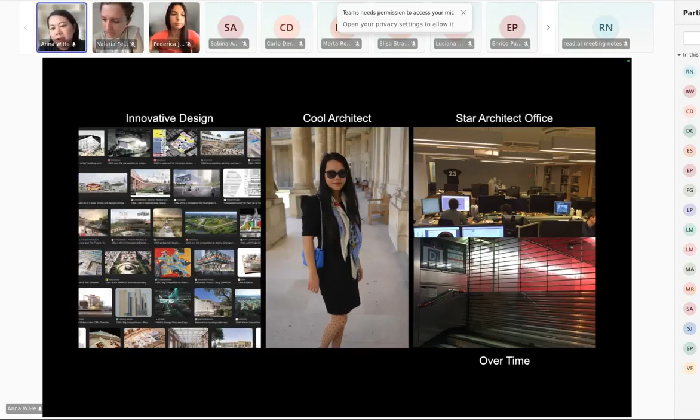First of all, we heavily rely on manual input, our time and our efforts, everything, so a lot of overtime almost every day. And for those innovative designs, all those nice ideas eventually went to the archive folders or trash bins. It's kind of a waste of our intelligence. I also found myself eventually became a competition architect, which means I only knew how to do nice design for competitions, but I was not really an architect. I kind of got lost in the loops between the procedures, from the briefing to concept design, schematic, and all the workflow. I wondered where this came from, and I found that the nature of our workflow gave us at least five gaps.

The first gap is between the brief and our understanding, meaning what clients want and what the possibilities are. Something we have in mind is not aligned with the client because we are two different human beings and we don't understand each other. So there are a lot of barriers by language, by any kind of communication or methodologies. So this is the first.

And then second is when we start to do the concept design, once we understand the client's demands, we find ourselves with a gap between our brain and our hand. So something we thought cannot really be represented out to our team, to ourselves, to the client. So once we try to represent ourselves in an architectural format, we cannot really get the right point.

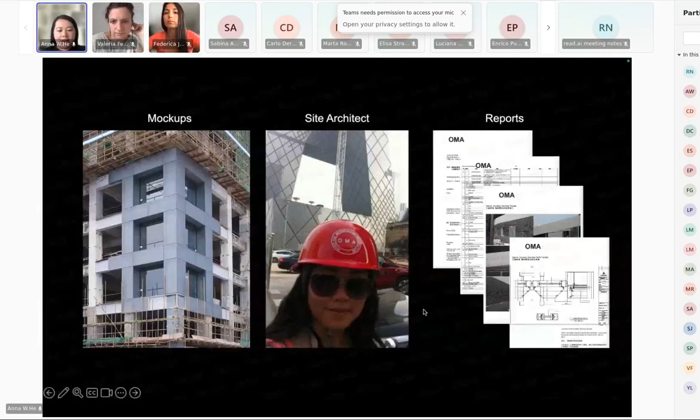All right. I went to the site and became a site architect. But I also found on site there are a lot of things unexpected, because the site architect by nature translates information between the professional language and the ordinary language, from the consultant, designer, contractor towards the client and the procurement team. So we kind of got lost in translation. And with these two parts, lost in loops and lost in translation, I was wondering what we can do to make it better.

So I was thinking maybe we are lost in the loops because we lack automation. We only rely on manual work, which gives a lot of work and a lot of loops we have to loop around. And even if we understand each other better, we need automation to assist us to move easier or more efficiently in the loops. So this is the first thing I thought maybe is a solution.

And lost in translation, I thought that was maybe a lack of intelligence, because of all the things we don't understand about each other from the site, I mean, from the site condition towards the data towards the client's understanding. So how about we propose something to resolve these two issues? For lost in loops, lack of automation, we can use algorithms to design things. And for the second part, maybe BIM, the building information model, can solve this issue.

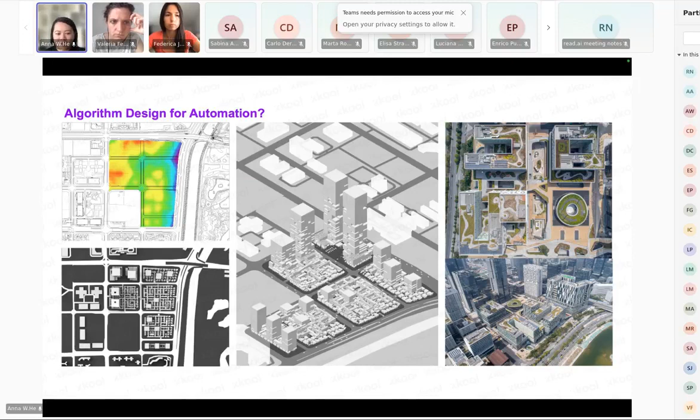And second is, how about BIM to resolve the loss in translation? Of course, we understand BIM is already very advanced compared to CAD. But according to the buildingSMART definition, we are still under level 2, level 3, meaning the machine-readable document and the machine-readable content. But in the future, we are looking for a new format, which is machine-interpretable content. What does that mean? It means the machine can do self-learning, self-analyzing, and validation, even iteration by itself.

The machine does not just communicate with the people, like level 3, or communicate the content itself, but the machine can communicate between different machine models. So this is the future format in our AEC industry. It's more like including all the data, model, and the pattern. All the things can be included together. And with this information, we can compare level 2, level 3, and level 4.

Level 2 only has the model itself in 2D or 3D, the geometries, and it can be opened by software and edited, of course. And level 3 is you have semantics to enrich the content, however, still manually. So it has the data, but level 4 is with data, model, and the pattern. The pattern means the intelligence within it. And this is the goal that we are looking for.

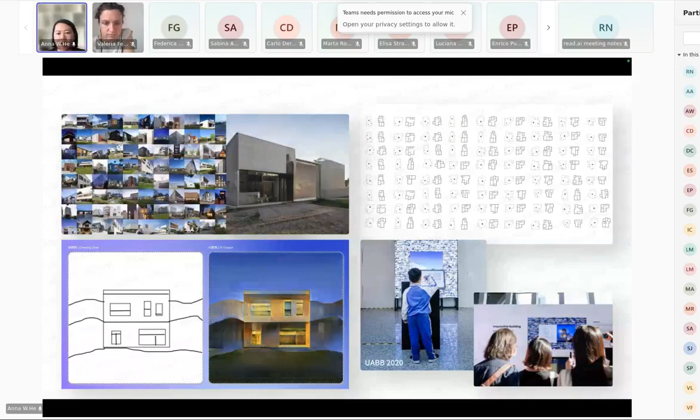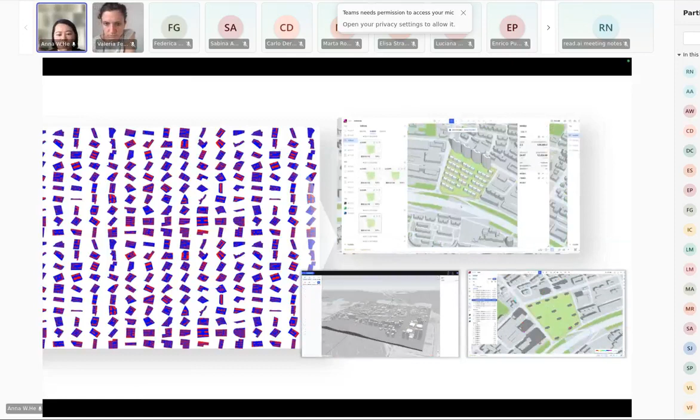We're using GANs to generate images. Today, of course, everyone knows our LookX or Midjourney, but we already started on this quite a long time ago. And meanwhile, we have been working on 3D geometry generation since 2016. Those start from the bigger scale of master planning and then go towards the building scale of the inner space. For instance, this one, you're just using those color bubbles to generate the layout, as well as to generate the 3D geometry in certain building typologies.

So our vision is to really add AI into the workflow. This AI can be our AI or can be other AI models. For instance, the first gap between the client's mind and the loops, it can be large language models. And today we already have a lot of mature large language models, open source or not, doesn't matter, but there's a certain capability that can fill in the gap.

And what we are focused on is discovering the possibility if we chop this workflow into 3 parts. So understanding the requirements can be dealt with by large language models, the chatbots, and then discovering the possibilities. This is the part in AEC, at least, we need to work out, not just images, but also the conceptual and the schematic. Those are 2 parts of it. And finally, the output feasibility or feasible set. And that needs more details with the level 4 format. So I will start at the first part and then go to the second and then the third.

The first part, I think everyone understands right now. You can just throw your briefing into ChatGPT. It will give you a lot of explanation or analysis out of it. But what we need to do, the second part, is how we can merge with the current architectural workflow.

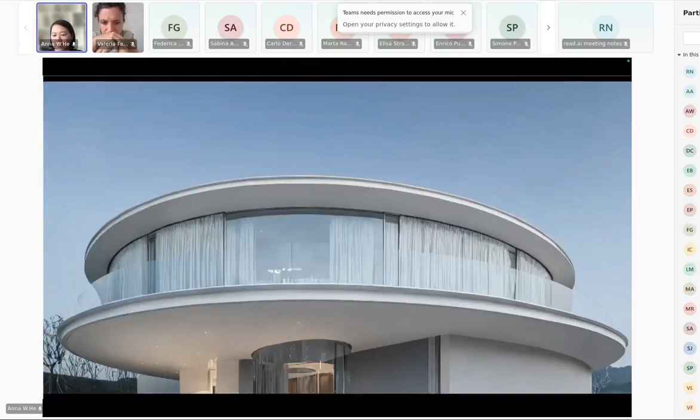And then they can directly try to find possibilities or ideations from his sketch immediately in front of all the audience in this forum. So this is also mimicking a scenario. If he's facing his client, he can sketch and generate something for the client's understanding, and then they can easily communicate to fill in the gap, and also fill in the hand and brain gap. So this is one of the examples.

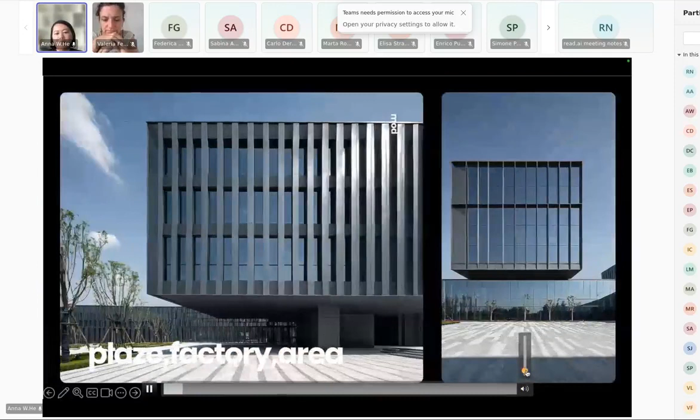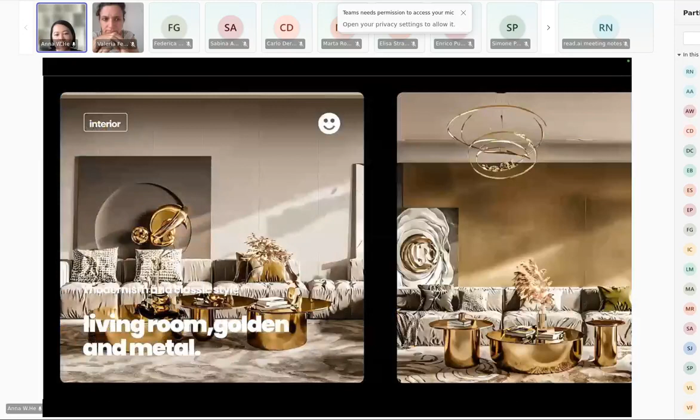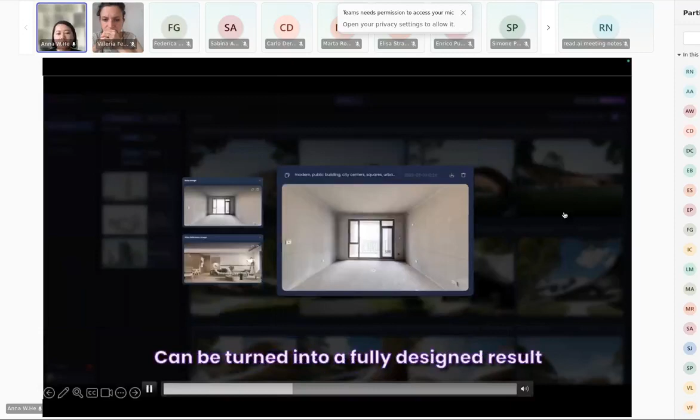So I believe maybe some of you already use LookX, the platform that we have. LookX is now a platform a lot of designers and architects are using, from text to image, image to image, and image to video, and so on. And we are more focused on the design parts, especially architecture, urban design, landscape, and all our base models are trained on that data. And meanwhile, different styles and the demands of the industry are embedded into the system. So it's quite precise to translate an architect's ideation into something the client and team can understand.

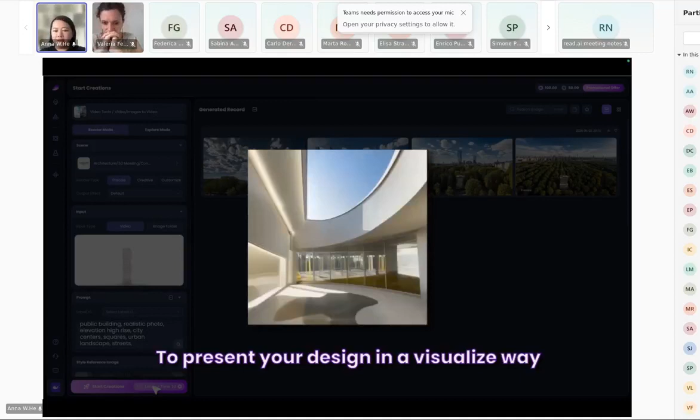And meanwhile, there are a lot of tools. For instance, this one, you can choose an area to regenerate, and here you can screenshot any kind of software, no matter if it's Rhino or Revit, to generate things. And also video generation, we can use text to video or image to video. Image to video is now much better because the image has a certain quality and can ensure you get the right thing. And with this kind of video generation, at least you can give the client a 3D feeling and experience, and they can understand what the thing is doing.

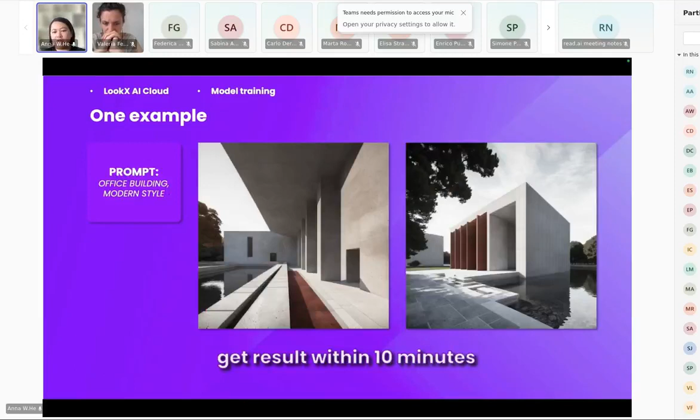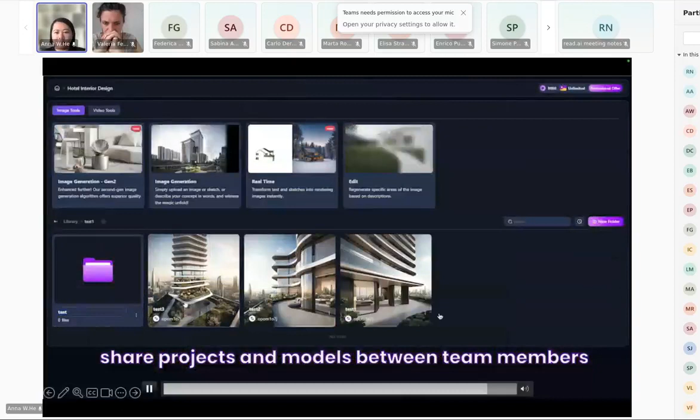And besides that, we provide this AI for the users, like architects, to use and to train their own models. So you can use your own favorite images and train the model as a LoRA model. A LoRA model is a low-rank adaptation model, and you can use it for your team. And your team can train models together, and then just use them for your company or for your team, whatever it is. And this is something we can help the team to manage all the team figures.

Yeah. Meanwhile, we also got what we call the dashboards for the team to check. So this is basically the first and second parts of the gaps that AI can help with today. So this is one of our latest models, Gen 2; you can get from image, and meanwhile generate the videos. Again, our models are trained for architectural purposes, designer purposes. So it's more precise in that direction compared to Midjourney.

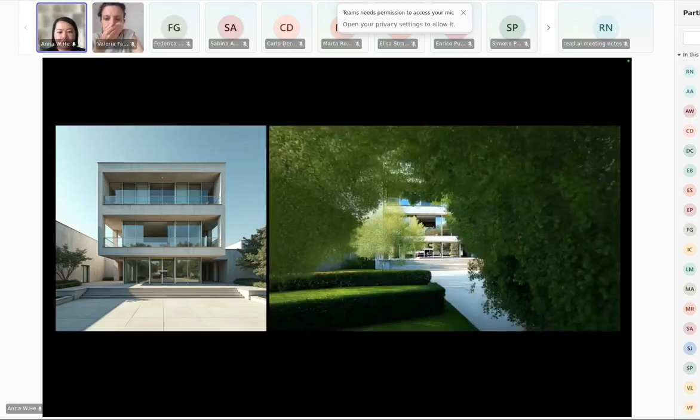And we can see today, this is our creation plaza. A lot of designers share their outcomes on this plaza. So you can see what others did, and you can learn from each other. I think this is something really interesting, that we create this kind of ecosystem so everyone can see each other and learn from each other. You can just click on one of their works and find out what their prompts are, how they deal with images, and so on.

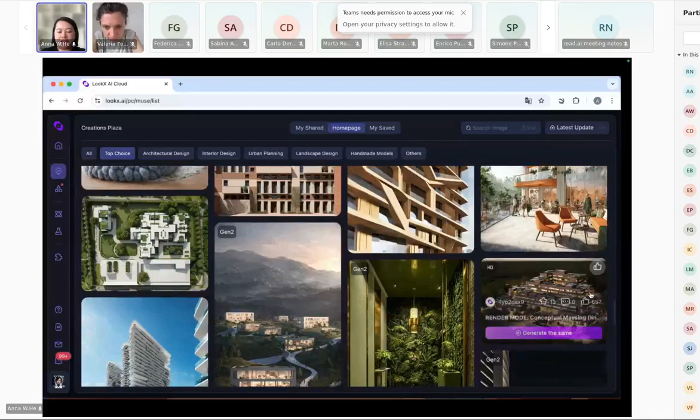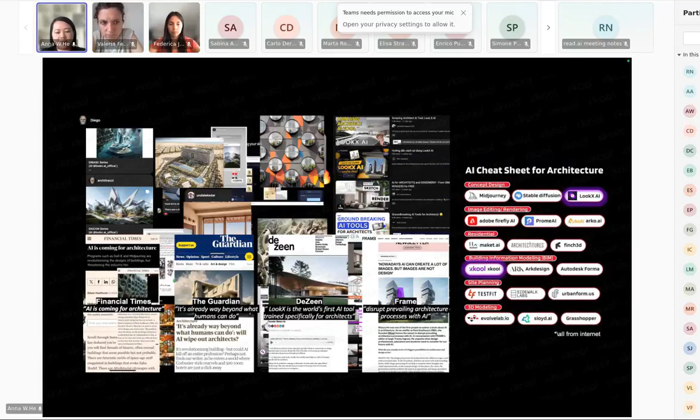Actually, I had a discussion with Rem. Rem was here a couple of months ago, visiting Shenzhen with me in China, and we introduced what our AI can do to him. And we quite agree that the early part of the design workflow definitely needs to be driven by people, which is from the issue finding, positioning. Today our forum is positioning AI, right? So this is something very important.

Before we start to do something, we need to think through and then find our argument, and then the solutions for different scenarios. And from there on, AI can start to help on the schemes, on the representation, and perhaps also on the realization. So this is what we think of as the ideal model for the later part, how AI can be involved. I will give an example of one project from A to Z where we have involved AI.

First of all, this is a competition in the beginning. The site is located in the center of China, in between downtown and one of the largest cities in China. And the issue we find is that it's in between a biological habitat and a human habitat, and how to find the balance point to get this coexistence. So this is the issue we're trying to find out. And second, the positioning: the thinking part of it is we want to embed some of the pavilions into it, but maintain the nature, try to maximize the nature there.

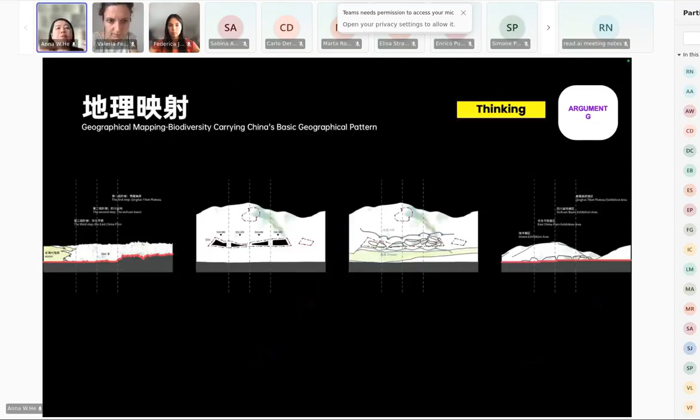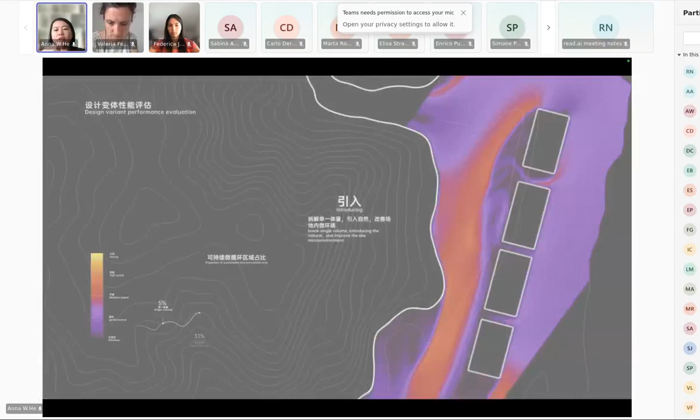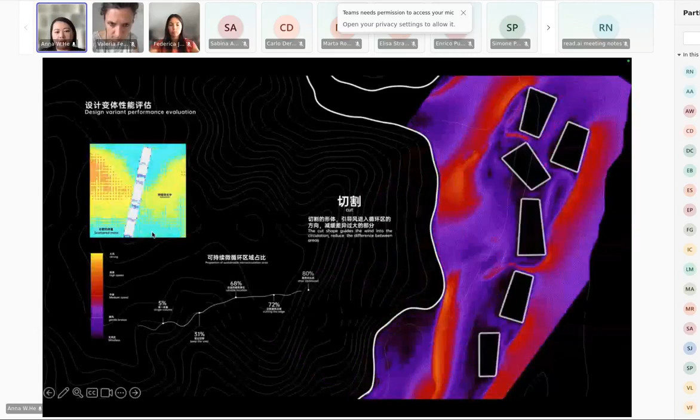But how to get this position? We need to find out what's the possibility of it, the argument. So our argument is to have the geographical mapping of the biodiversity and carry it into this design. So we're using AI to generate the forms, and those forms will be trained and iterated, and then we find the best solution to create a microenvironment. And meanwhile, to really simulate the performance of it as pavilions. This is a biodiversity museum, sorry.

And finally, the forms are generated as the schemes. Once we got all our positioning, our arguments, our thinking, we understand what to do. Then the form naturally comes to us, because we already have our idea that we want to minimize each pavilion and get all the ventilation through, and in front of the water we can get really the biopaths from the hills and the mountains towards the water. So this is how the work was done.

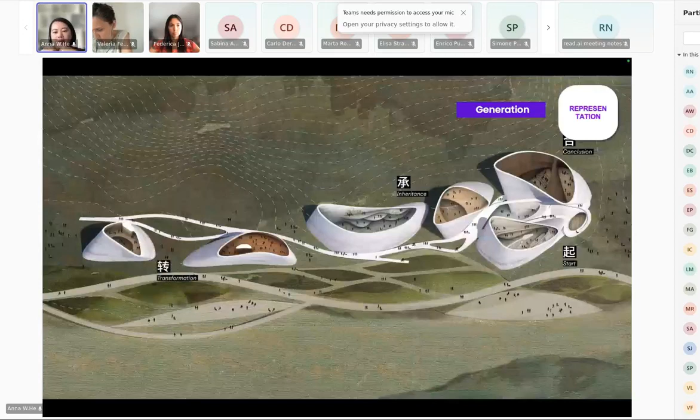And the competition actually had 200-something competitors. We won the first prize. And then the question in front of us was how we're gonna do it.

We are working with one of the design institutes. The most important question is how to turn this irregular curvy shape into something that can be realized. In the beginning, it had 30,000 different tiles. Using the current algorithm, you can only get down to 116, but that's not enough. So we're using AI to iterate here about 44 million times to get 12 standard triangular tiles, to really minimize the tiles on the facade and reduce the cost of this construction.

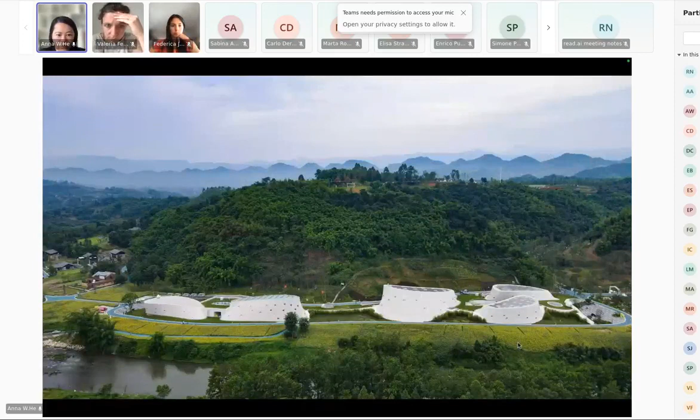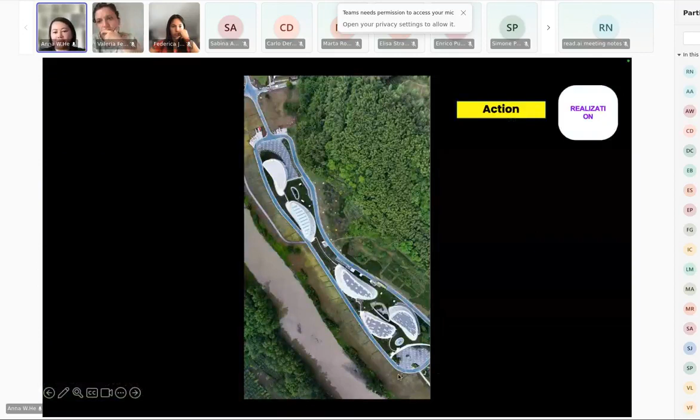And this is the building right now. It's being built just according to what we have optimized. Of course, the landscape is quite a different story, but you can see the relationship between the water and the hill is retained. It's not like other competitors, who just did one bar because it's a linear site. Different shapes are created along the river, but it still allows the bike path to go through. Now this is from different seasons. So that is one of the projects.

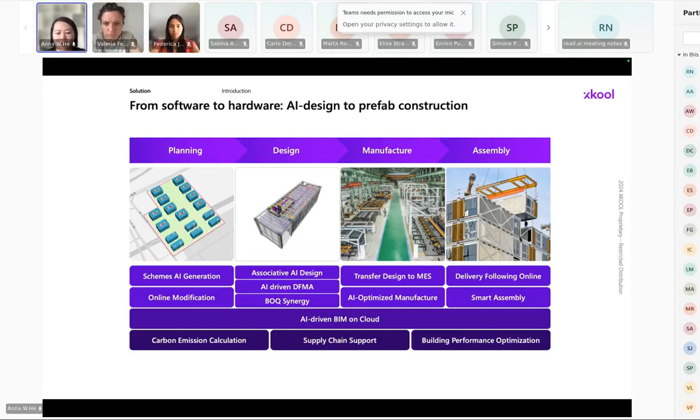The second one I want to introduce, but because of the time I think I need to speed up, is using modulars. This is very important to how we work things out, because we started with the planning. You already saw the previous scheme as a very generic master plan, but everything needs to go to the details. So here we integrate with the modular system, and this modular system is prefabbed in a factory. So it's an idea shifting from top-down design towards a top-down bottom-up merging as DFMA, design for manufacturing and assembly with AI. I'll just walk through a little bit how we did it.

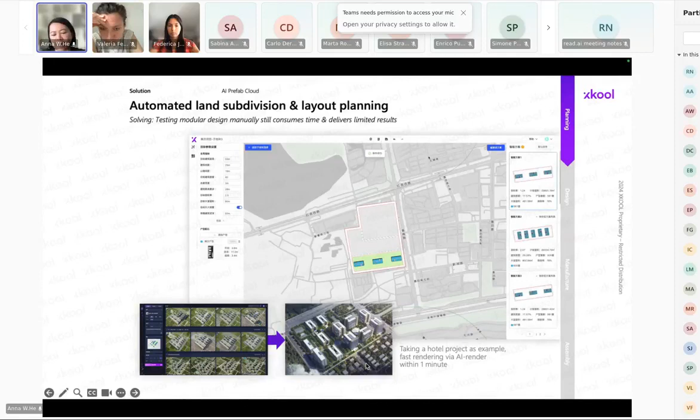First of all, we upload the plot to our platform. This platform is not yet open to external usage, but is mostly used by our collaborators and our own design institutes. They use it to generate firstly the master plan, and then generate the image we saw there, and fill in the first two gaps between the client and us. Because the clients here are mostly developers or investors, they need to understand the numbers. Just one single nice image doesn't fly. You need a precise model to give them the GFA, and then they can use that GFA to really calculate their ROIs.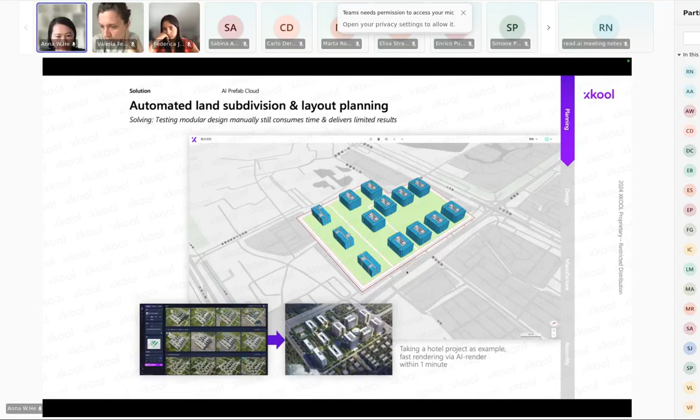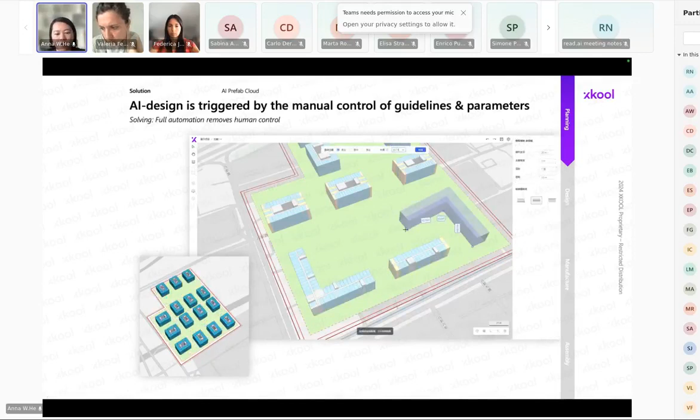With the details, we can go further and edit each of the buildings. Meanwhile, this is level 4, meaning if you have the data and the model, you have the pattern. So if you change each of those items, everything else changes. And the machine can do self-iteration here as well. Moving forward, or in parallel, we can design each of the modules with our supply chain. For instance, trying to find the best solution for this wall: what is the best combination of different panel sizes? And then with the supply chain, you can see its precise state.

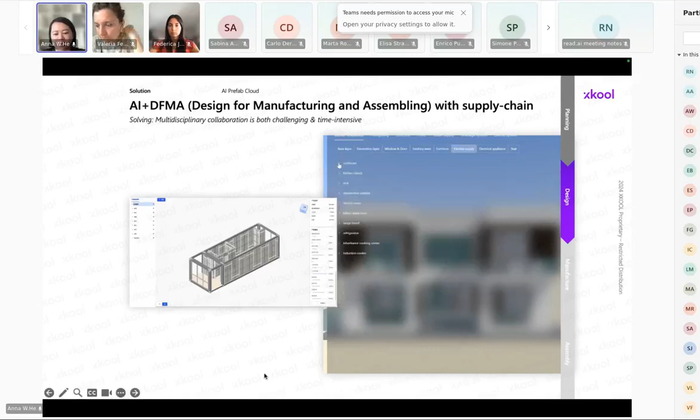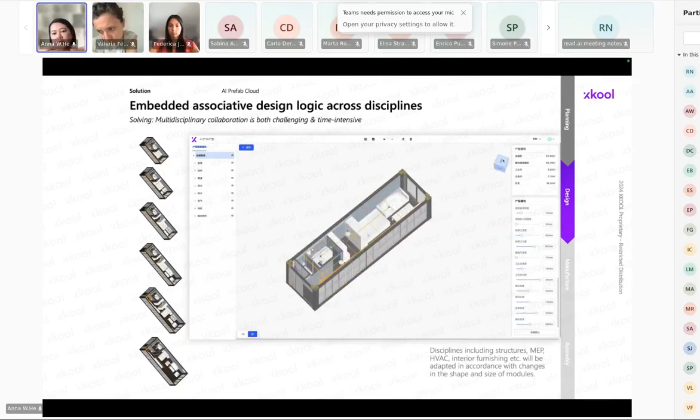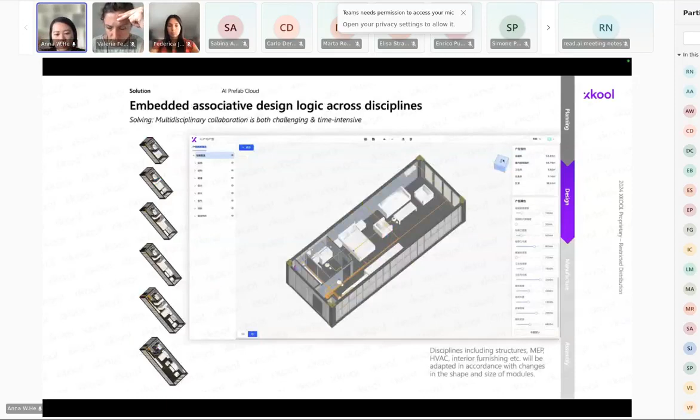With all the different disciplines checked on those items, we can start to establish a design for this modular space. It's a hotel. Sorry, the first page jumped too fast. Yeah, it's a hotel with 4,000 keys again. When we do the interior, we need to integrate with the structure, MEP, and so on, not just architecture. And the most interesting part is this model doesn't just design a master plan or a module, but integrates from the module at room scale, towards the building scale, and towards the master plan scale.

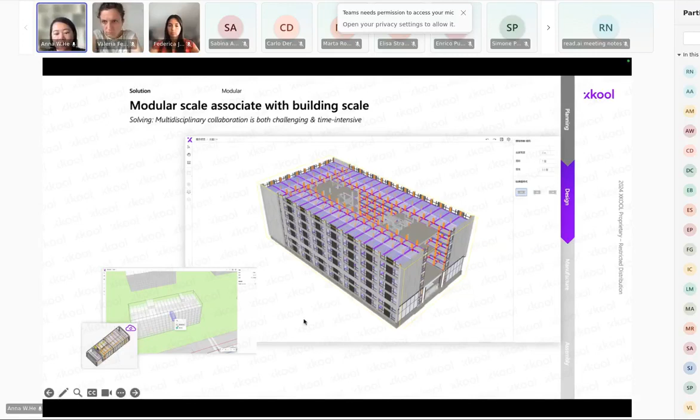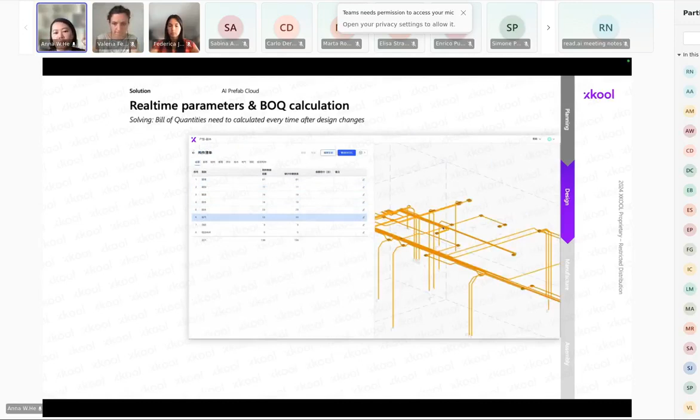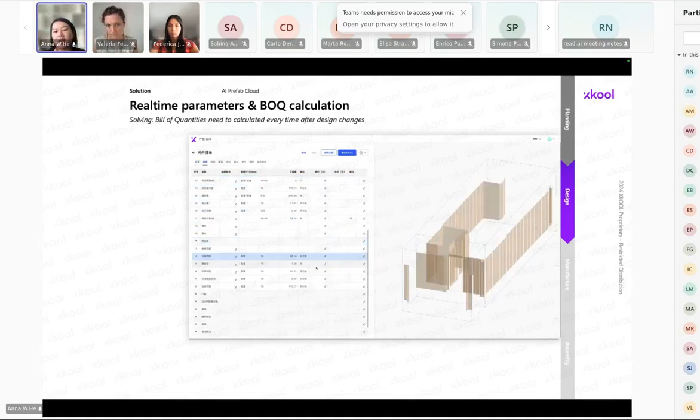And the most important thing is it's linked with the supply chain, and will give you the BOQ information. So you will have all the BOQ right there, with the quantity, even the price. So you no longer need value engineering, because from the beginning of the design, from the master plan to the building design and the rest of things, it will be part of the work. And by transforming our format into the factory format, we can move forward to production.

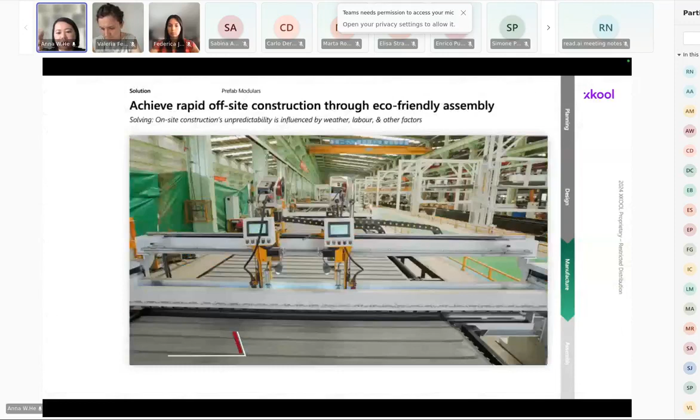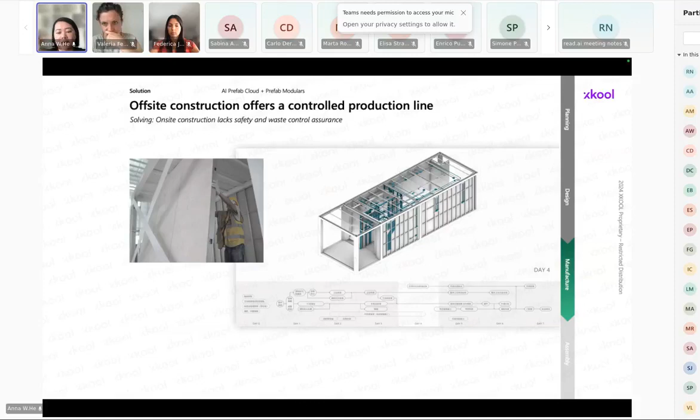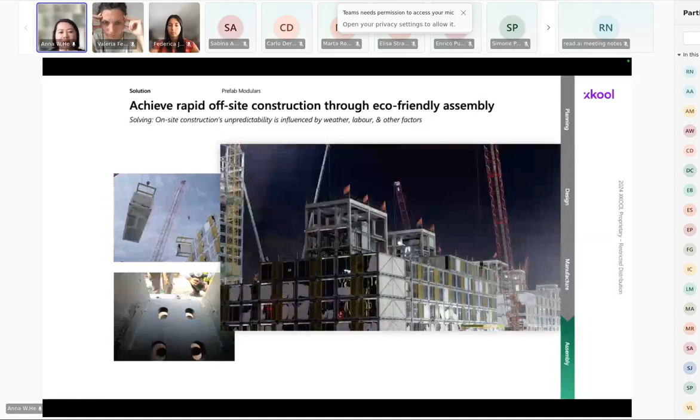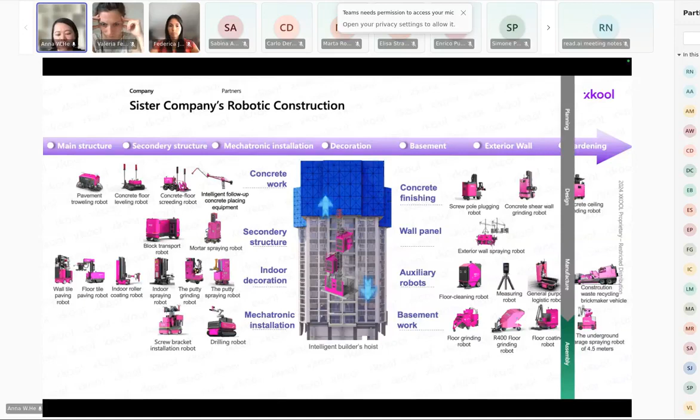For the part of the work that cannot be done in the factory, we have this robotic assistance. These are robots from our sister company, which can do different on-site works, and which also use this level 4 format to communicate with each other. And finally, this hotel is done in 4 months. Not just this one hotel, these are 2 different hotels.

So the beauty of this thing, as a conclusion, is with AI and modular integrated construction, we can really speed up in terms of the time and the efficiency, the quality, and also the issues I found out in the beginning.

So in the end, I believe a lot of people have the question of what we do as architects. I think here just reference to Charles Darwin, that today, of course, we do a lot of things, but in the future, we do less of this. AI will take more. However, we will do more things, new things. So it is not the strongest of the species that survive, nor the most intelligent, but the one most responsive to change.